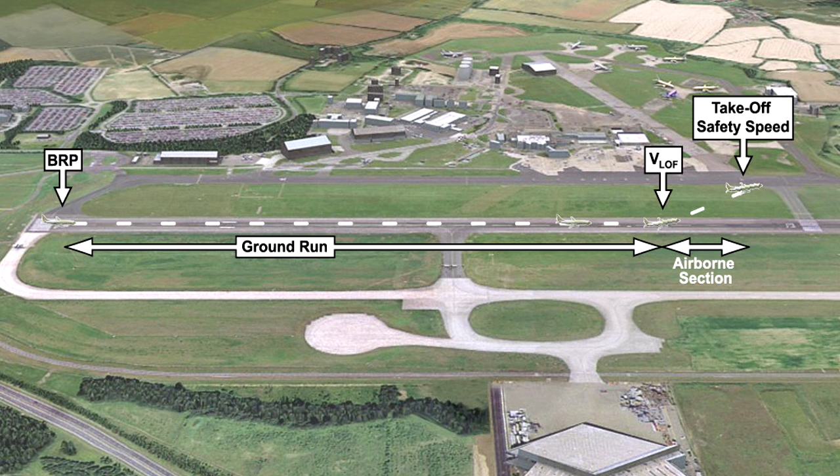The takeoff can be divided into two parts. We call these the ground run and the airborne section. The first part, the ground run, is usually referred to as the takeoff roll required, or the takeoff run required, which is the distance traveled from brake release to liftoff. The second part of the takeoff, the airborne section, is commonly referred to as the initial climb. This is the distance covered from liftoff until the aeroplane reaches the screen height. The combined length of the takeoff run required and the initial climb is known as the takeoff distance required.

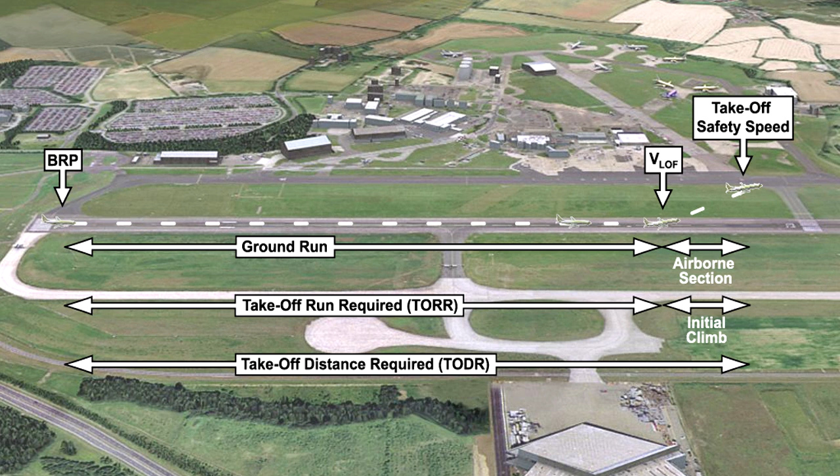As pilots, we need to make sure that the takeoff distance required does not exceed the available distance at the aerodrome we are using. This can be achieved by checking those factors which affect the takeoff distance and ensuring that the performance achieved will still enable us to take off safely within the constraints of the airfield. This may seem obvious, but there are many incidents to suggest that this important consideration is often forgotten.

A long takeoff distance is considered to be poor performance, whereas a short takeoff is considered to be good performance. However, in commercial transport, the performance is not measured in terms of the takeoff distance, but rather in terms of the weight that can be carried. A good performance, in terms of a commercial flight, would be a takeoff with a large weight, whereas a poor-performing aeroplane would only take off with a small weight. As a general rule, any effect that would cause the aeroplane performance to reduce would cause the aeroplane's takeoff distance to increase and/or to reduce the takeoff weight.

To better understand takeoff performance, we need to fully grasp the forces acting upon an aeroplane and how these forces might change throughout the takeoff. Shown on screen is an aeroplane at rest at the brake release point. A typical 737-400 series has a maximum all-up mass of 68,000 kilograms.

This mass will be accelerated from the center of gravity of the aeroplane towards the center of the Earth by gravity. The resulting downward force is called weight. The objective of the takeoff procedure is to create a sufficiently high enough force to oppose this weight and allow the aeroplane to fly. The principal force which is used to oppose weight is lift.

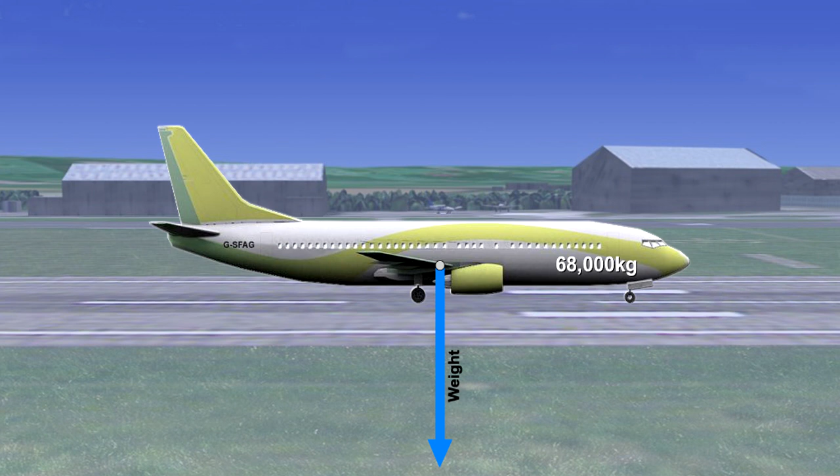In simple terms, to generate a lift force, we need a mass of air to pass over an aerofoil. The aerofoil in our case is the aeroplane wing. To make the air flow over the wings, the aeroplane must be pushed through the air. The faster the aeroplane travels through the air, the more lift will be created. The aim at takeoff is to gain a sufficient amount of forward speed to create enough lift to help counteract the weight, and thus allow the aeroplane to fly.

However, in order to move the aeroplane through the air, there must be a horizontal forward-acting force. This forward-acting force is generated by the engines and is called thrust. With a given amount of thrust, the aeroplane will accelerate and air will flow over the wing, thereby creating lift.

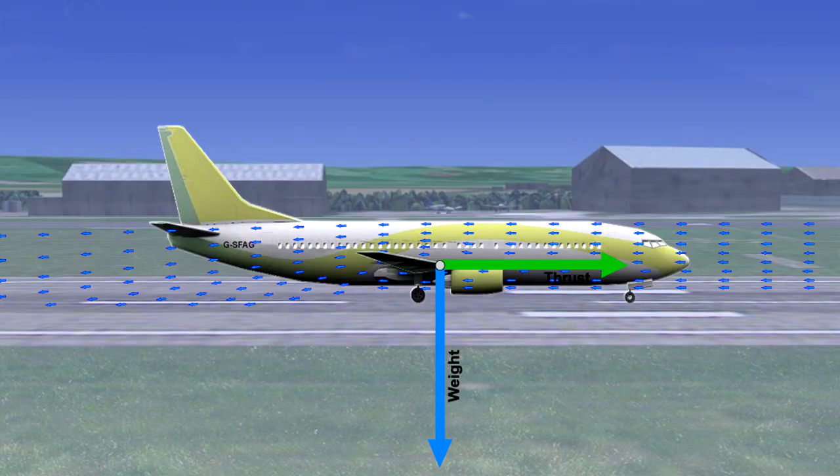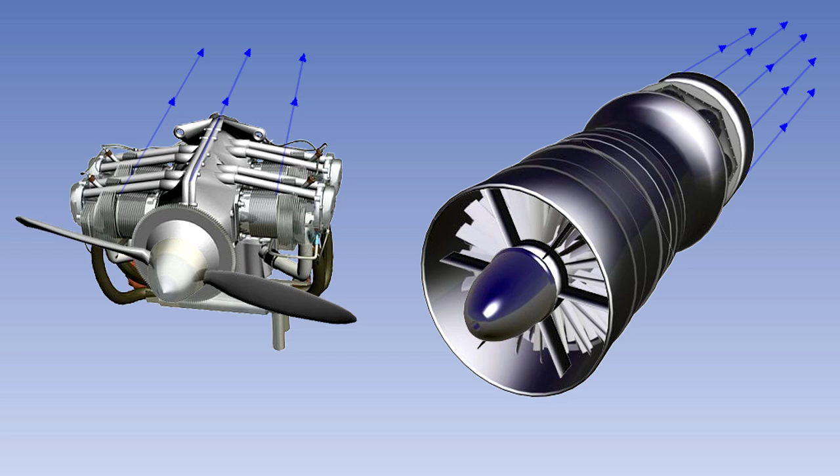A detailed explanation on how propeller and jet engines produce thrust is beyond the scope of this course, but nonetheless, brief explanations will be provided at appropriate times. The basic concept of the modern jet engine is that it draws a large mass of air through its intake and accelerates it, and finally ejects it. The principle involved here is mass multiplied by acceleration produces a force. This is an adaptation of Newton's second law of motion. The greater the acceleration of air, or the greater the mass of air, the greater the thrust force produced.

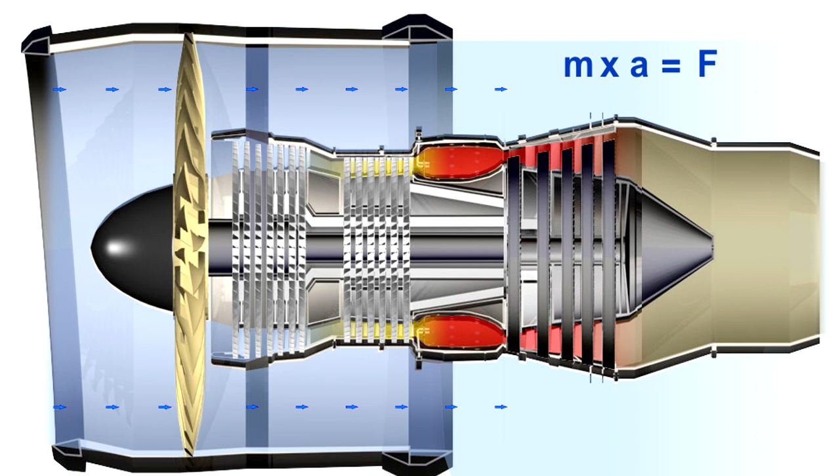However, as the aeroplane travels faster, the velocity of the air entering the engine starts to match the velocity of air exiting the engine. The result of this is that the air is not being accelerated as much, and thus less thrust is produced. So, as the aeroplane speed increases, the thrust produced by the jet engine decreases. This loss of thrust with increasing forward speed is referred to as intake momentum drag.

When the aeroplane reaches speeds in excess of 0.2 Mach, the air ahead of the engine starts to compress, increasing the air density and therefore increasing the total mass of air flowing through the engine. This helps to limit the loss of thrust caused by intake momentum drag. This thrust recovery is called ram recovery or ram effect.

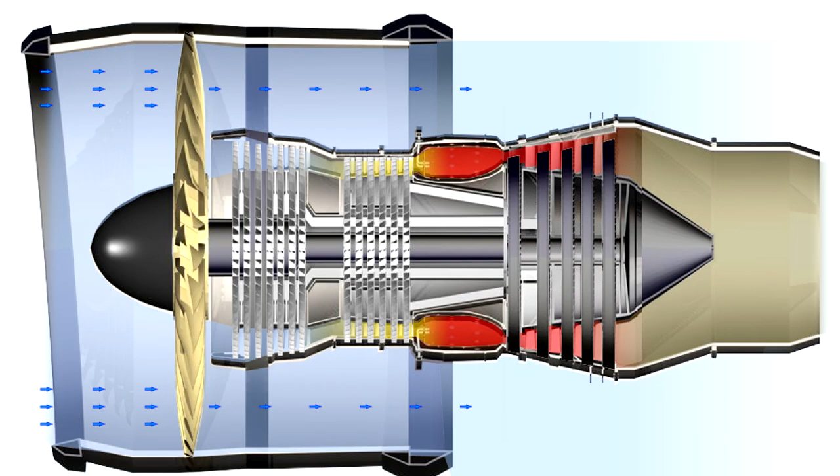Initially, as speed increases, thrust will fall, but above 0.2 Mach the thrust loss starts to reduce due to the ram effect. In the speed range used for takeoff, the jet engine aeroplane never attains sufficient speed to gain the full ram effect. Therefore, during takeoff, as the jet aeroplane accelerates down the runway, thrust will reduce.

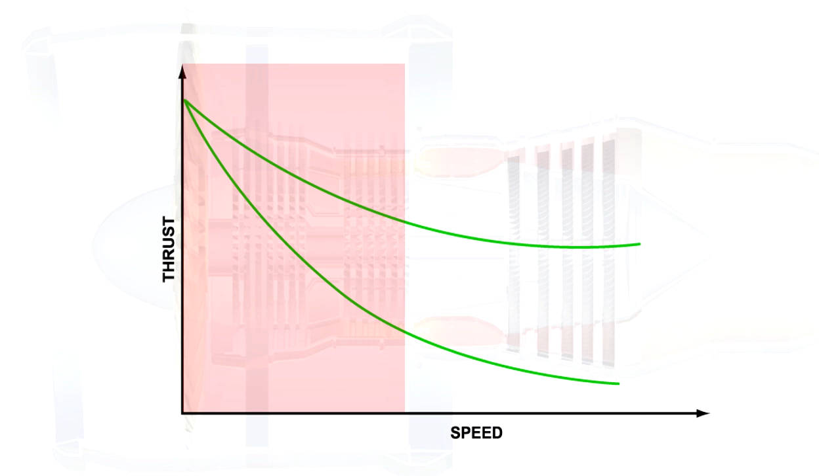The propeller engine generates its thrust in a similar way to the jet engine. A mass of air is still accelerated rearwards, but the propeller is acting much like a wing, in that it produces lift, only this time in a forward direction.

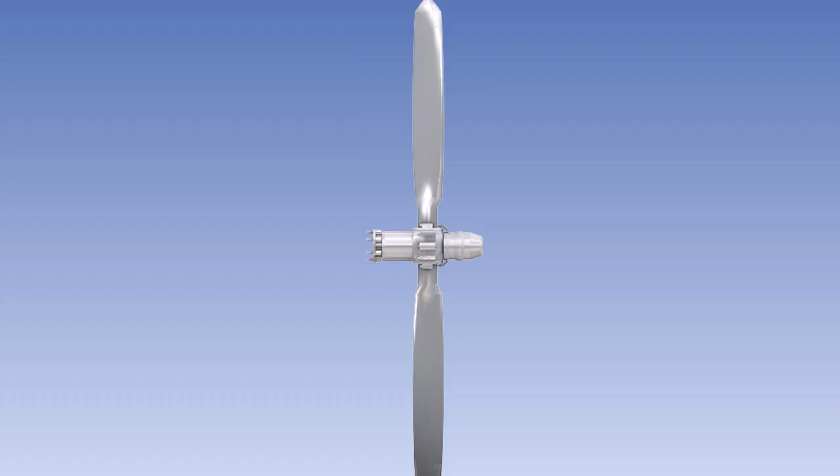If a mass of air were to pass over an aerofoil, lift will be produced. In order to pass air over the propeller so it can generate lift, it must be turned through the air by the engine. Shown here is a propeller in cross-section. The amount of lift produced by the propeller blade, and the amount of air displaced backwards, is a function of the angle of attack.

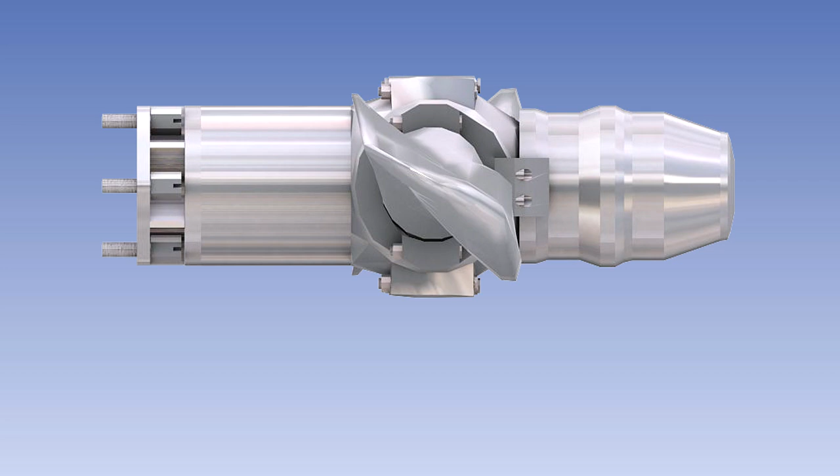The angle of attack is the angle between the relative airflow and the chord line of the aerofoil. The greater the angle of attack, the greater the lift force, and the greater the amount of air displaced rearwards.

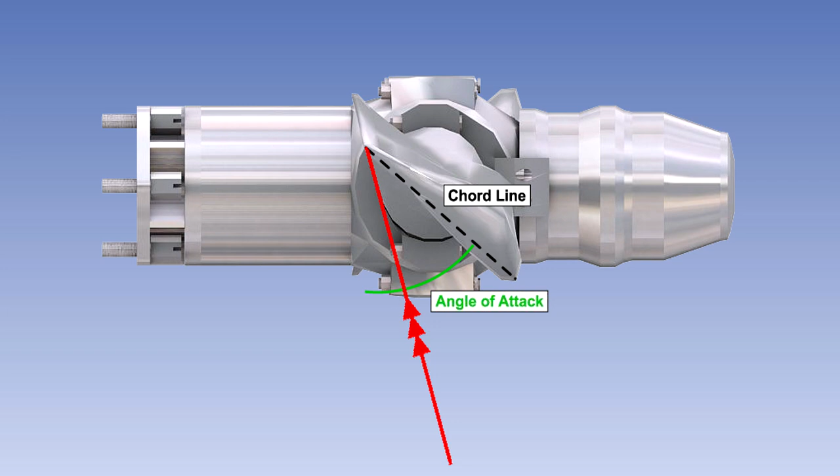When the aircraft is stationary, the airflow relative to the propeller is from beneath, as shown. However, as the aeroplane gains forward speed, more of the airflow comes from the front, and as a result the angle of attack and subsequent lift produced will decrease. So, similarly with the jet aeroplane, a propeller-driven aeroplane will experience decreasing thrust during the takeoff.

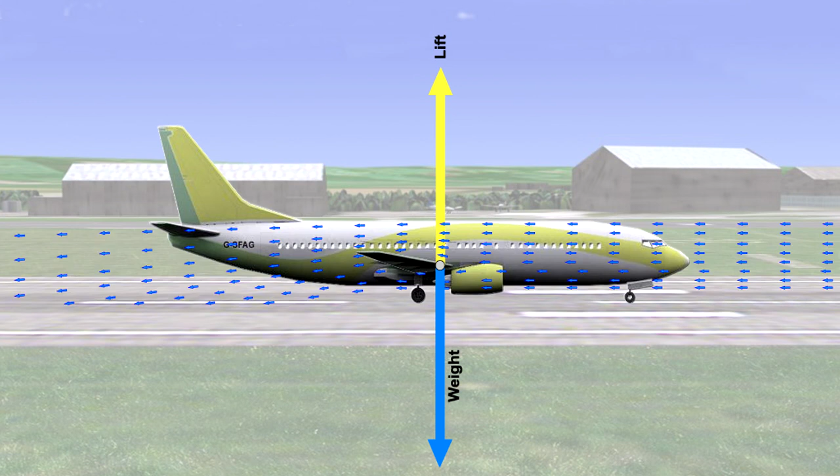There is one more force to consider. As the aeroplane accelerates down the runway, it will encounter several forms of resistance, called drag. Resistance from the air is called aerodynamic drag, and resistance from the wheels and the runway is called wheel drag. We'll deal with aerodynamic drag first.

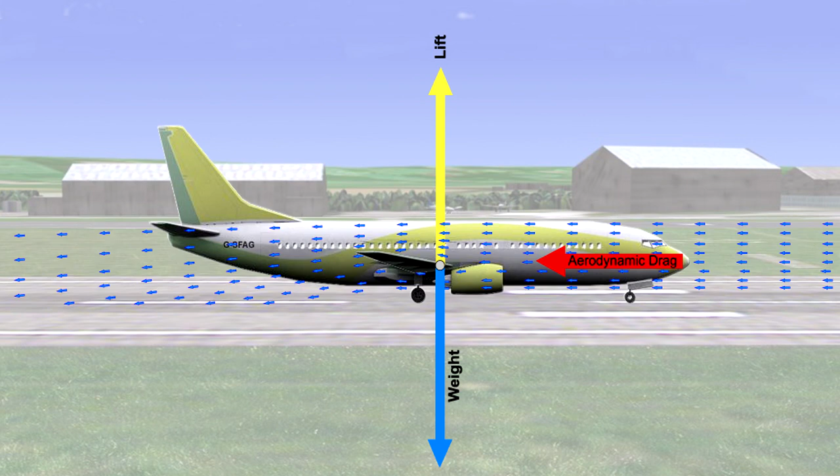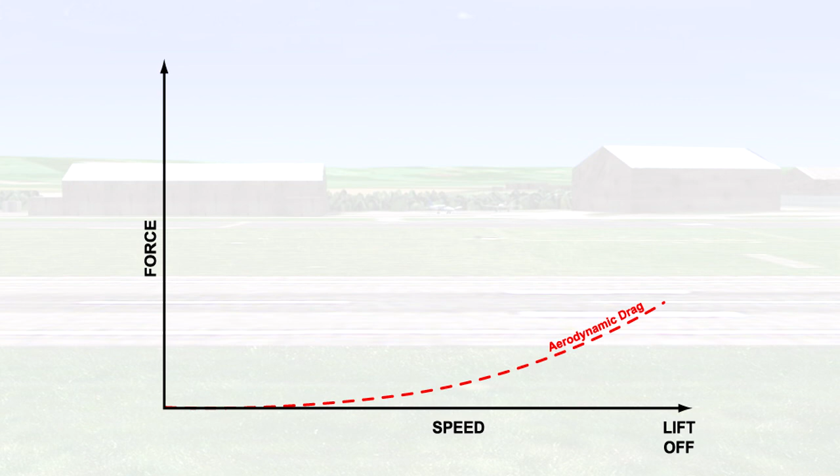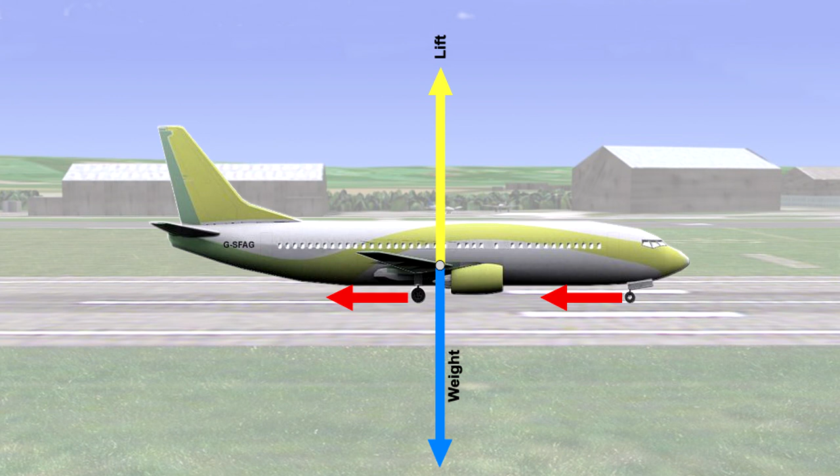Having discussed aerodynamic drag, let's now consider wheel drag. Wheel drag is basically the friction between the wheel and the runway, and is a function of their frictional coefficient and the load placed on the wheel.

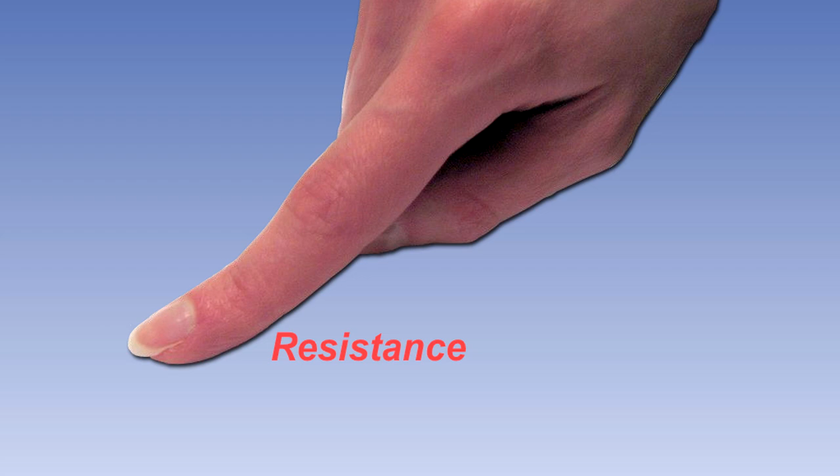As an example of this, press your finger lightly on the desk and push your finger forwards. You will notice a resistance to the motion of your finger. Repeat this scenario, but now press down harder. You will notice much greater resistance to the motion of your finger. This example aptly demonstrates that the greater the load placed on the wheels, the greater the wheel drag.

Returning to the takeoff, as more lift is generated by the aeroplane accelerating down the runway, there will be less load on the wheels, and thus the wheel drag will decrease. Wheel drag will eventually reduce to zero once the aeroplane has achieved liftoff. To summarize, aerodynamic drag increases during the takeoff, whereas the wheel drag decreases during the takeoff.

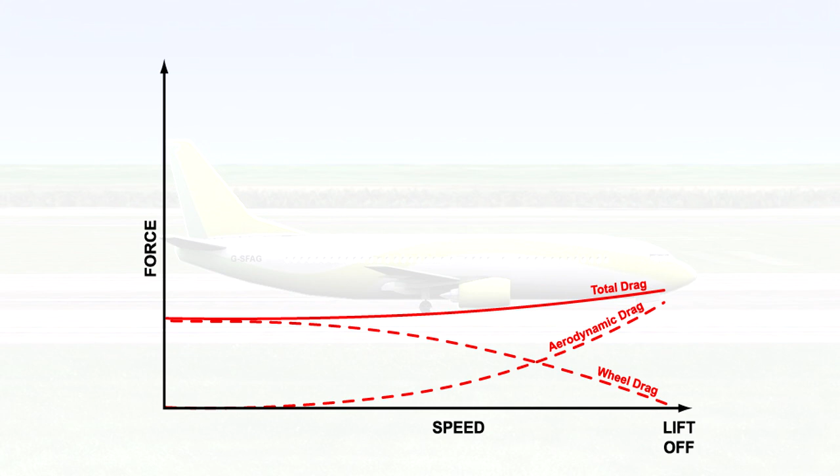This excess thrust is what is used to accelerate the aeroplane. Notice, though, that as the aeroplane gains speed during the takeoff, there is less and less excess thrust available, and therefore less acceleration.

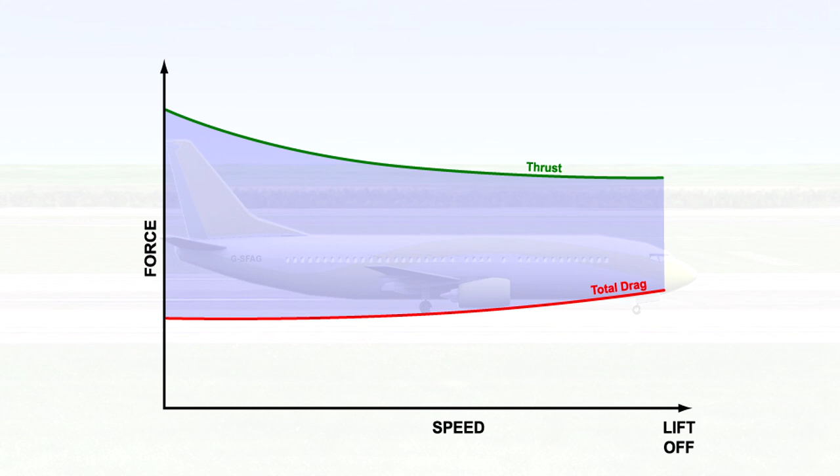Next, we'll examine what determines the takeoff distance, and also what roles the four forces play in determining the takeoff distance. In order to do this, let's briefly examine the formula used to calculate the takeoff distance. The letter S is the displacement or distance required from rest to reach a specified speed, which is v, with a given acceleration, a. Acceleration is force divided by mass.

The force is thrust, minus aerodynamic drag, and minus the wheel drag. Expanding the formula in this manner allows you to see how a change in one of the variables has a knock-on effect on the takeoff distance.

For example, if there is a reduction in thrust, acceleration will reduce. If acceleration reduces, then the distance required to reach a specified speed increases. Although we have already mentioned how some of these variables change during the takeoff, we'll now analyze in detail all the forces that can affect the takeoff, with our principal concern being how these factors affect the takeoff distance.